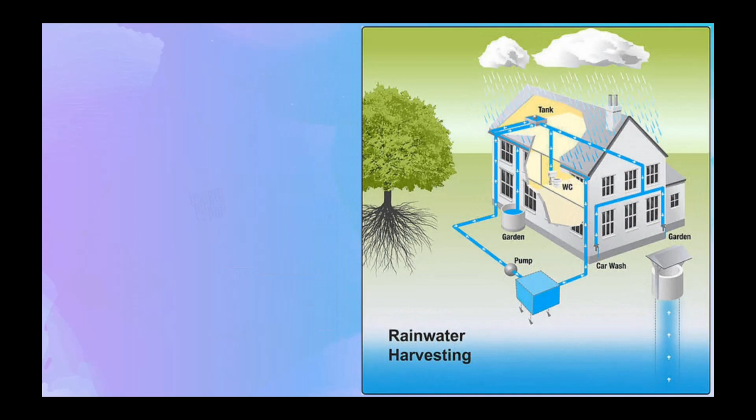So the question may come, what is rainwater harvesting? It is a technique to capture and store rainwater for different uses of domestic purpose and side by side in agriculture through wells or hand pumps. Now it has wide application in most urban areas. Students, it is a technical method of accumulation and deposition of rainwater for reuse, but not to let it run off on the surface.

This rainwater harvesting is also called Palar Pani locally in Rajasthan. It is the purest form of natural water.

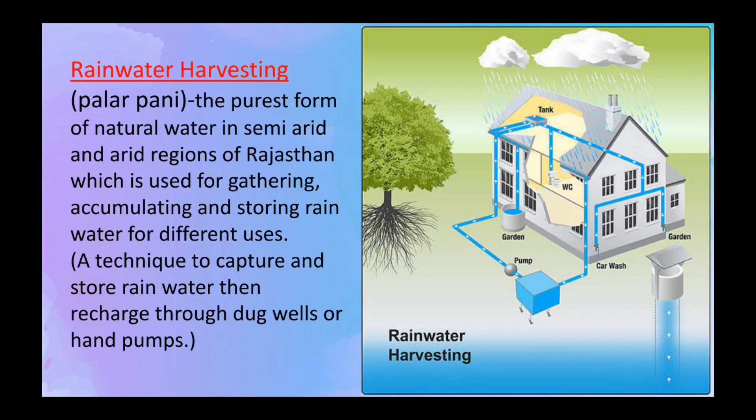In this slide, I have shown you the figure of a building. It shows a well-planned and managed rainwater harvesting system from the rooftop of a building. Here, an underground tank is connected with a rooftop storing source, and from there the water is discharged for gardening-like work of the home. Next, my dear students, what is the need of this water harvesting system?

It is just to improve groundwater quality and to minimize the decreasing of groundwater table. It helps in increasing agricultural production multi-fold, even in the off-season. To support nature, to maintain a balanced ecology. To prevent soil erosion and flooding in urban areas. My dear children, it is also necessary to manage our sustainable developmental plan, isn't it?

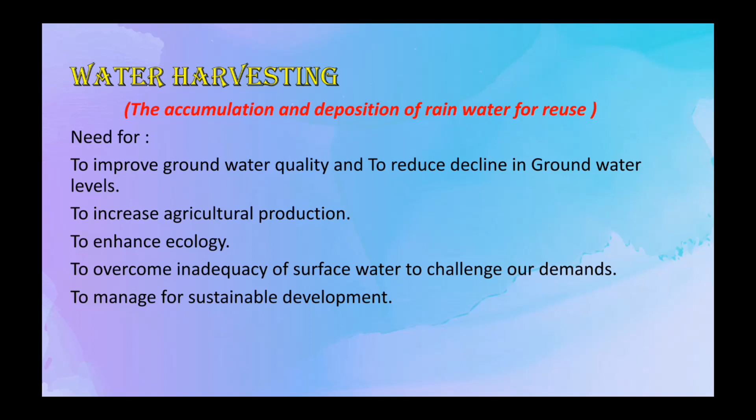Next you will see. Now let me discuss the advantages of rainwater harvesting. At the very outset, I must say rainwater harvesting reduces soil erosion in urban and semi-urban peripheries. It mitigates the hazardous effects of drought. It reduces flood hazards by decreasing the surplus water flow on the surface.

I will never forget to tell you that rainwater harvesting helps in increasing groundwater levels, which is now very much the need of the hour. You might have heard that in many cities of India, like metro cities, they are now facing scarcity of water. They give a huge cry in the summer season that their groundwater level is decreasing.

The system is economically friendly. It is a lower cost technique for water storing, isn't it? This technique minimizes the wastage of land, as the tanks are constructed underground at one's own residence. It also helps in increasing the productivity of the aquifer. Lastly, I must say it is eco-friendly.

Dear children, see this slide shows about embankment dams. You know what embankment dams are? It is made up of mud, stone, or rock. It is easy to understand. This embankment dam is part of hydraulic structures.

So the question may come, what is a hydraulic structure? It is a structure in a water body used to disrupt the natural flow of water. For example, dams, or as I have shown here, embankments. Hence, since ancient periods, we have heard of and seen many sophisticated hydraulic structures built of stone, earth, brick, etc., for irrigation or water supply, isn't it?

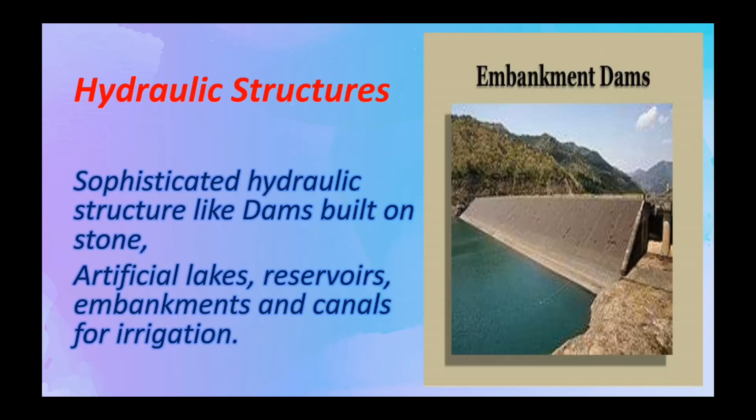Now let's see the examples of hydraulic structures. Here I will give you many examples. Say Sringaverapura. It is a place about 45 km from Prayagraj, capital of Nisad. In mythology, in the Ramayana it is written that it is the capital of Nisad, where Sri Ram, Lakshman and Sita Devi stayed one night before crossing the river Ganga while they were in exile.

Here exists an extraordinary hydraulic structure which was built in the 1st century BC. Water, mainly rainwater or floodwater of the river Ganga, enters this structure and fulfills the local needs.

Similarly, in Odisha, called Kalinga, earlier kings also made many hydraulic structures for irrigation. Dear children, many water harvesting structures were made in Andhra Pradesh also, near Nagarjunakonda, and in Karnataka, near Bennur.

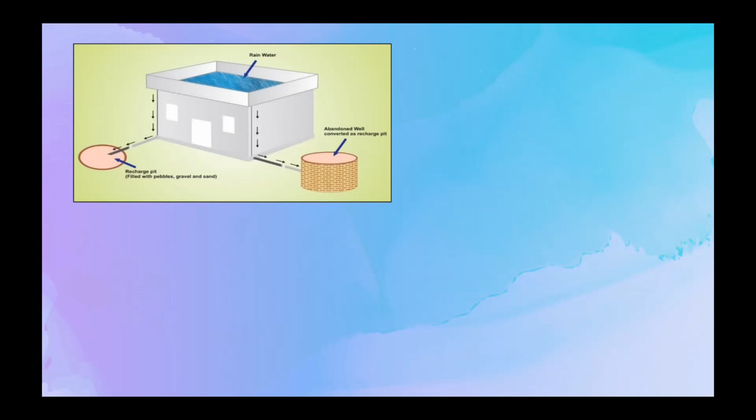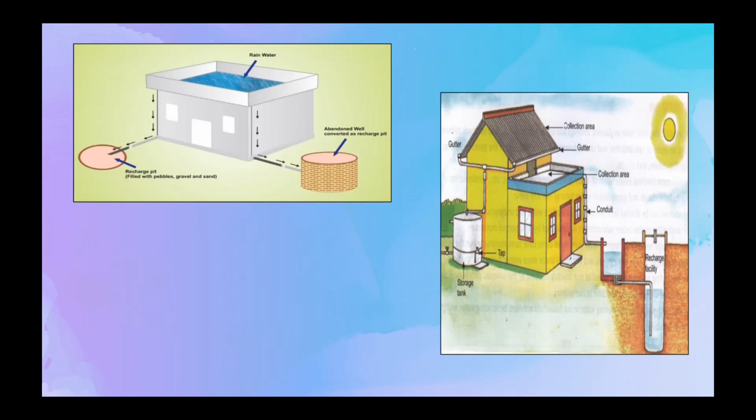Now dear students, in present time you will see some of our states have made it compulsory to make rooftop water harvesting systems. Among them, credit is going to Tamil Nadu, which first started or compelled the people to make rooftop water harvesting systems.

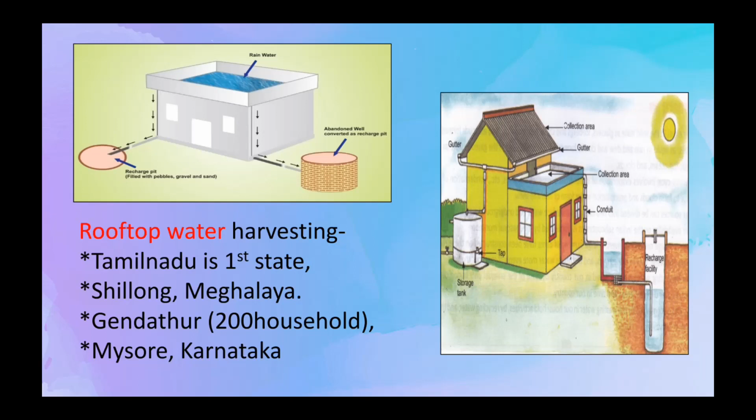Then you will see Shillong, same system in almost every house. Again, Gendathur, a small rural village of Mysore district in Karnataka, almost unknown to other parts of the state or country, but now very much famous. Why? The villagers have installed rooftop rainwater harvesting in their houses at their own cost and now became self-sufficient for water. It is only due to their need, skill and strong dedication, isn't it?

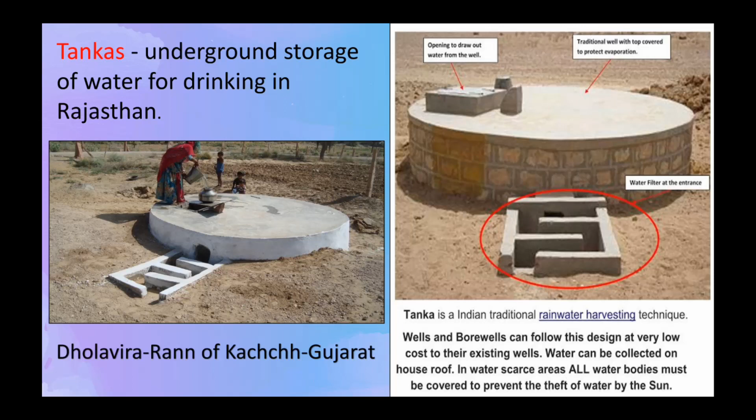Similarly in Gujarat, you will see Dholavira near Rann of Kutch also has structures like these. The purpose is only to store rainwater and utilize it in time of need.

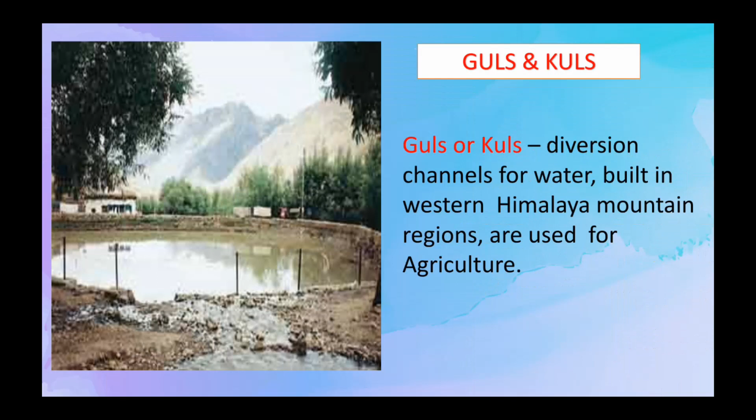Here I am showing you guls and kuls. These are diversion channels built in West Himalayan areas. Similarly, you will see johads in Rajasthan. Johads are nothing but locally rounded type ponds of Rajasthan.

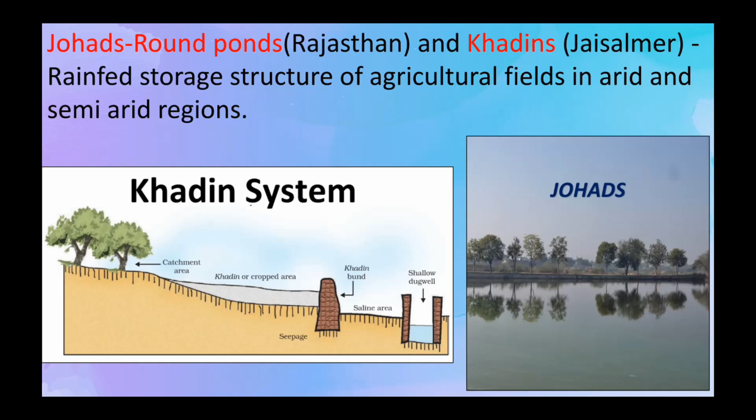In Rajasthan, the people also constructed khadins around Jaisalmer areas. Jaisalmer is in the completely western part of Rajasthan, for storing rainwater.

My dear students, now let's go to the east part of India. Come to West Bengal. Here in the flood plains of West Bengal, inundational channels were dug to channelize the flood water of river Ganga and rainwater for harvesting.

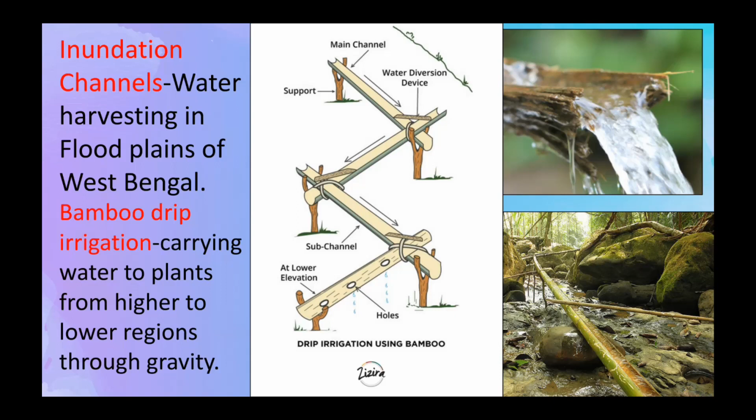The picture shows here the system of bamboo drip irrigation. Due to high gravity, from the upper part of the mountain slopes, the spring water comes downward, and in this way it helps the agricultural fields.

Dear students, now from this part of the lesson, what have we learned? Describe 4 traditional methods of rainwater harvesting adopted in India. Possible answers are: tankas, khadins, johads, inundational channels, rooftop rainwater harvesting, guls and kuls, like this.

Next question: what is bamboo drip irrigation? It is a system which is 200 years old. Bamboo pipes are used to divert perennial springs on the hilltops to the lower reaches by gravity. The channel sections made of bamboo divert water to the plant or agricultural areas, where it is distributed into branches.

Clear? Next question: what do you mean by Palar Pani or drip irrigation? Palar Pani is also called rainwater locally in Rajasthan. It is considered the purest form of natural water. Drip irrigation is a kind of irrigation in which water gets dropped in the form of drips close to the roots of the plants for conserving moisture.

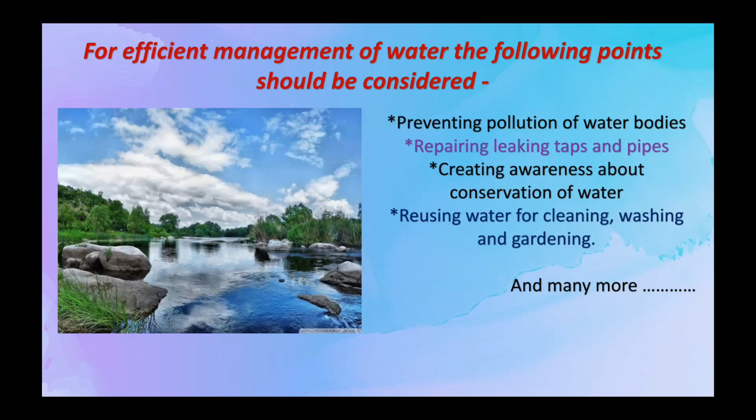I think this part of the lesson is completed. After this third part is over, I can say that the lesson as a whole, water resources for class 10, is completed. Wish you all the best. Thanks.